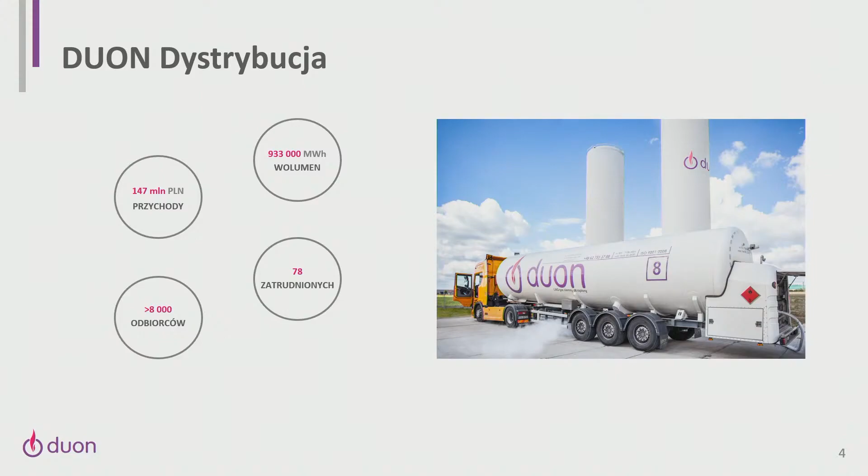The numbers you can see on the screen show clearly that we are solid, big partners: more than 900,000 megawatt hours, more than 8,000 consumers. We are owners of 21 regasification stations across whole Poland, and we have 720 kilometers of gas network and connectors.

We also have a transport company specializing in LNG transport, so we have all logistical support in a single hand. We have 18 road tankers and 16 road tractors, and we are switching to use LNG as fuel in our trucks. In a moment, we will be a living example of using LNG in transport in Poland.

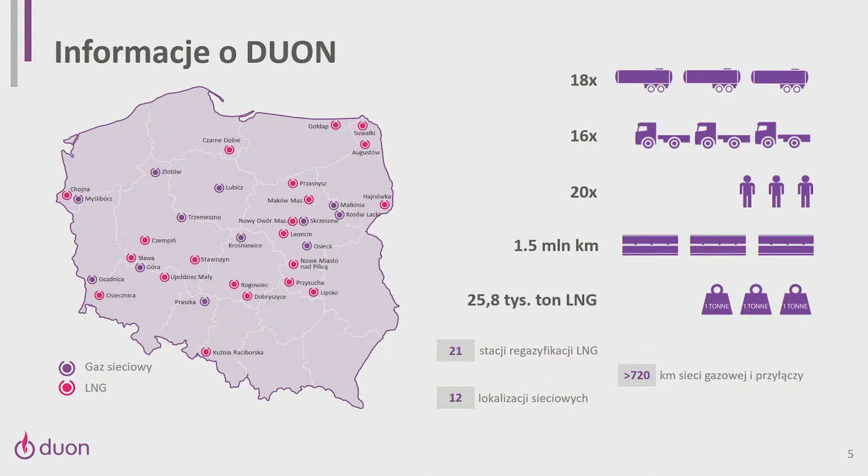Within our investment activity, we also provide electricity from cogeneration installations. Currently we see that this is a trend that's becoming more and more popular, and this market has been growing. Currently we either provide power, or in a moment we will start to provide power, at 29 megawatts of installed power from cogeneration.

Recently, we have introduced to the market a smart gas concept. This is a concept of smart power for our customers. We are able to cover all energy-related needs of our customers using this smart gas installation. From a single installation, we can provide heat, electric power, and also use it for cogeneration purposes.

This smart gas concept is actually a group of products, smart gas and smart drive. This concept consists of adjusting the size of the LNG regasification stations to the real needs of the customers. Usually, due to investment costs, the regasification stations were built for the largest customers, who were the largest consumers of gas.

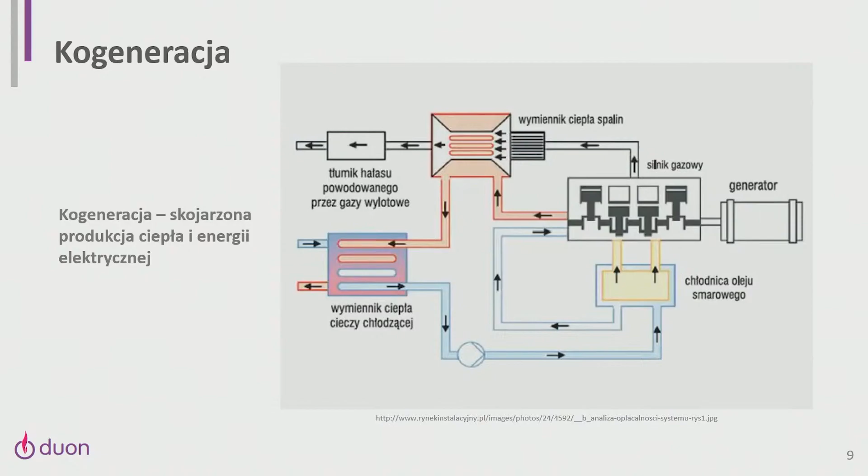So now we have a very simple example of how LNG could become a very simple bridge to solutions that will be able to operate as 100% green solutions when they run on the right fuel. This is especially important in the context of the current legal regulations designed to support development of cogeneration.

Since the previous year, we have a state system of supporting cogeneration. This is based on the bonus principle, I mean special subsidies for development of cogeneration installations. I'm not going to elaborate on this, so to cut the long story short, depending on the condition of the installation, whether it's brand new or already existing, we have a guaranteed bonus, cogeneration bonus, or individual cogeneration bonus.

So in the context of our product, smart gas, and in the context of using biogas, the guaranteed bonus is most important because it's dedicated for the smallest installations. The cogeneration bonus and the individual cogeneration bonus are designed for larger installations. So for LNG gas used as a fuel for cogeneration purposes, we may cover small installations of a power up to 1 megawatt to get this guaranteed bonus.

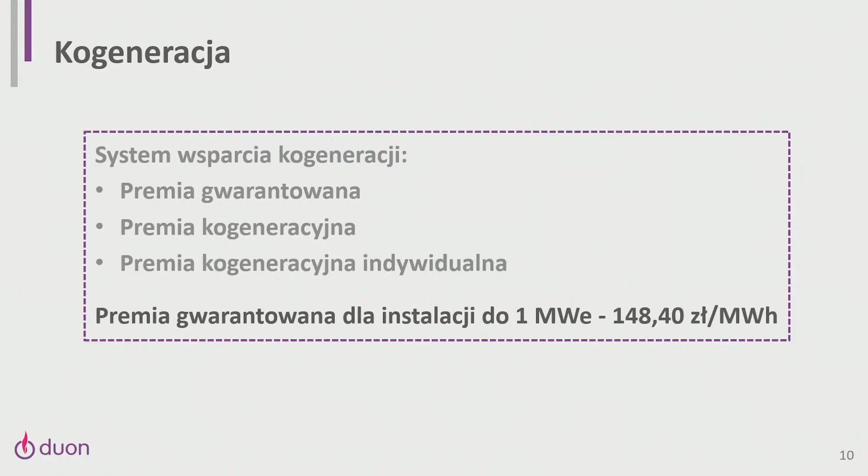However, keeping in mind that recently the energy minister made a decision that the cogeneration bonus is paid from the zero level, we need to wait until some critical mass is gathered for projects in this area. There is enough money in the system to support such projects, but there must be more projects. So this could very significantly increase demand for LNG as a fuel for this kind of installation.

And based on these governmental plans for the number of cogeneration units planned to be supported, calculated based on regulations in the law, I tried to estimate the size of the LNG market as a fuel for small cogeneration installations. We conducted these calculations for the Polish LNG platform as a member of this platform. As for the methodology, the base data on plant capacities were taken from the regulatory impact assessment, and I assume two ways of development of these installations.

In the first, pessimistic option, I assume that 10% of all installations will be running on LNG. In the optimistic variant, I assume 30% will be running on LNG. So 30% would be a very optimistic vision of the development of this market in terms of providing energy from LNG. And even in the pessimistic variant, in 2026 the volume of LNG will be 50,000 tons for these installations.

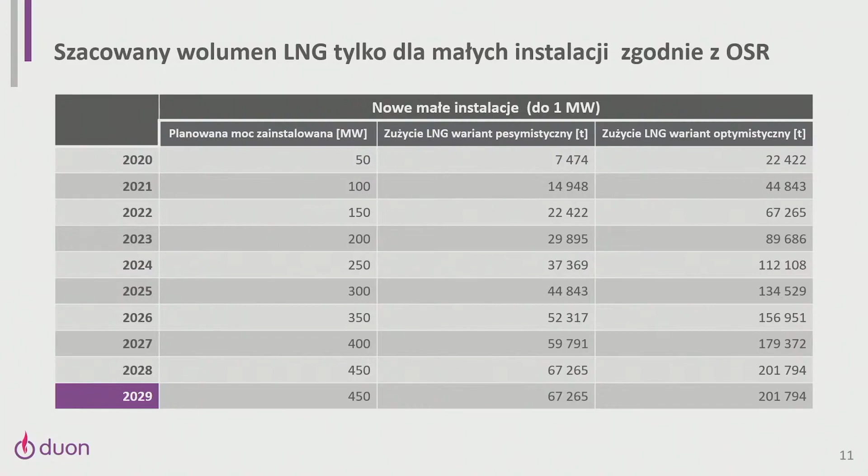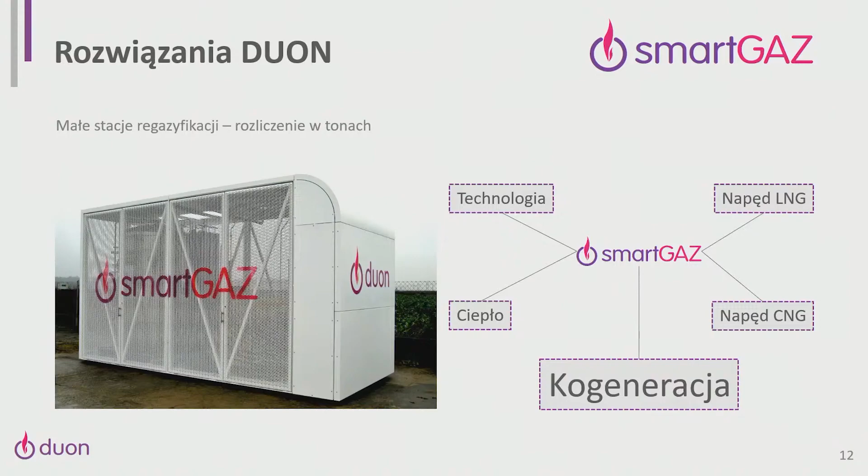And of course, with use of our dedicated solutions, this scenario will be closer to the optimistic rather than the pessimistic variant. We believe that cogeneration will play an important role in development of the LNG market in Poland, and the LNG market could in turn play a very important role in development of cogeneration. You saw this slide before, so coming back to smart gas, you can see that cogeneration is marked with much larger fonts. It seems cogeneration could be one of the most important applications of our smart gas concept, contributing to development of the whole industry.

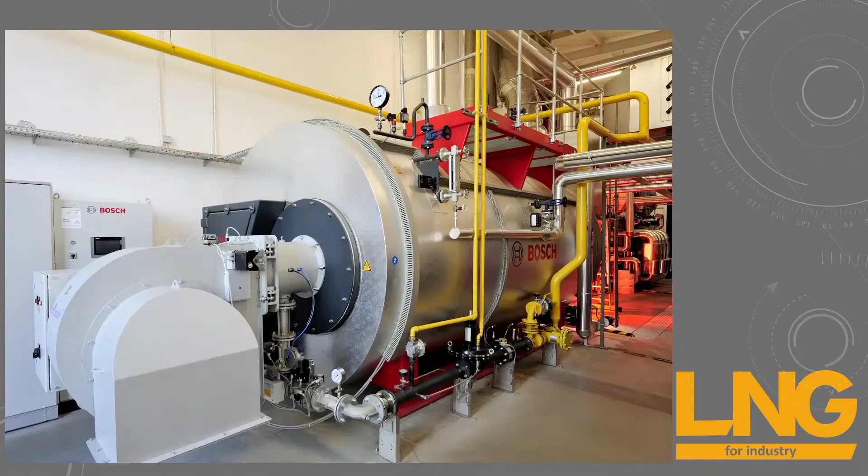The subject of my presentation will be cold energy obtained from the process of LNG regasification. I hope that our presentation will extend your knowledge about this. The Best Systemy Grzewcze company consists of several divisions. Engineering deals with design, delivery, assembly, servicing and delivery of fuels to all installation industries. This is the oldest part of our company.

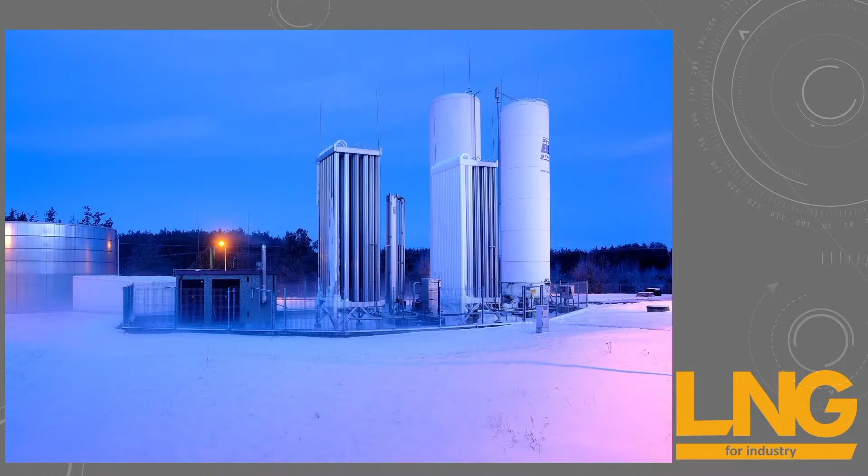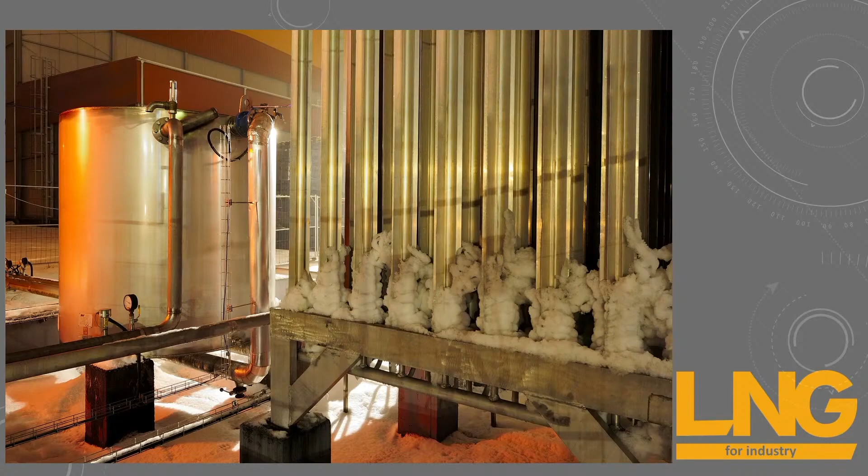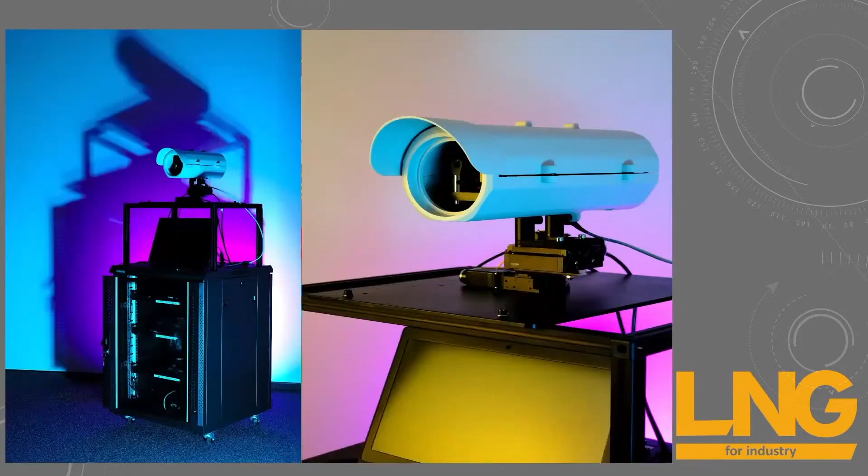Cryogenics, the regasification station. Although you could see some ice on this slide, these installations are environment friendly. We've been cooperating with the Polish natural gas company. Science. Within this division we develop the technologies of detecting methane with laser, and we also develop new technologies of welding. Due to safety reasons, we have invested in very advanced solutions, and production of our products is very advanced and

safe. Space. In this area we are testing an air platform that will allow us to detect steel pipelines buried underground, and we are going to detect any gas leakage from those pipelines from the air. Cryogenics, I mean the subject of my today's presentation. Let's come back to the regasification station.

Here we see our first cryogenic heat exchanger that we used to learn about behavior of the media, and based on this heat exchanger we developed another heat exchanger, and it's covered by a patent application. So this is the exchanger that was used in our research to be tested by means of a thermal camera to trace behavior of its parts.

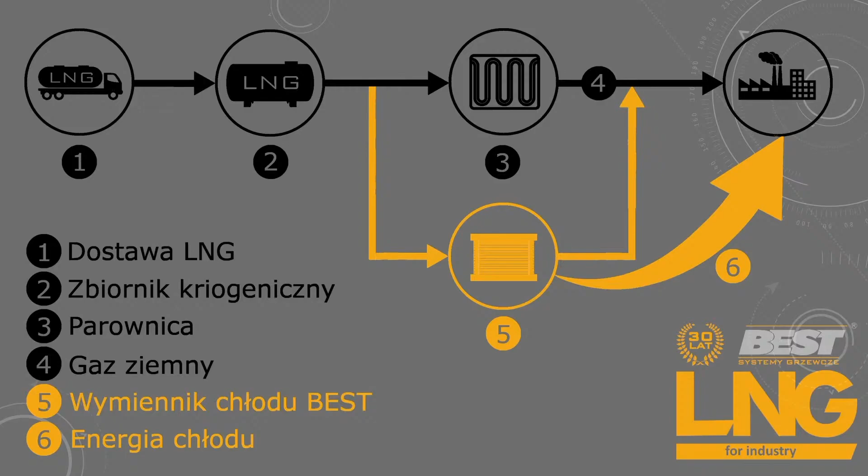First, the LNG is delivered to a cryogenic tank. Then it's sent to a coil of a heat exchanger to be regasified, and then it's delivered to the customer. Our installation is equipped with a heat exchanger that provides the cold energy. It's filled with glycol, and this cooled down glycol could be used to support operation of a cooling installation in an industrial plant. Today we also work on recovery of cold using other media than glycol.

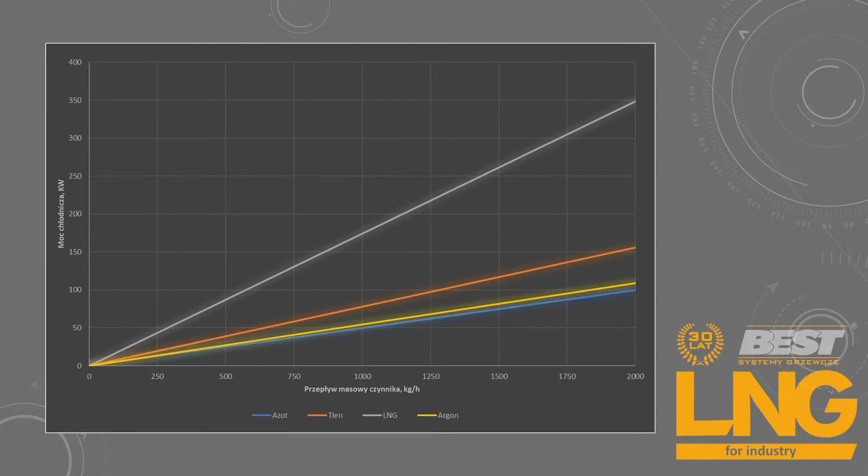Here we can see our heat exchanger. During the test you could see some ice, but this was done on purpose. This exchanger passed all the tests successfully, and it was made available to all possible customers. Our graph here shows how much energy could be obtained from liquefied gases. And there is no doubt that LNG is the best source of coldness. And we are going to focus on this. However, we also work on liquefied hydrogen.

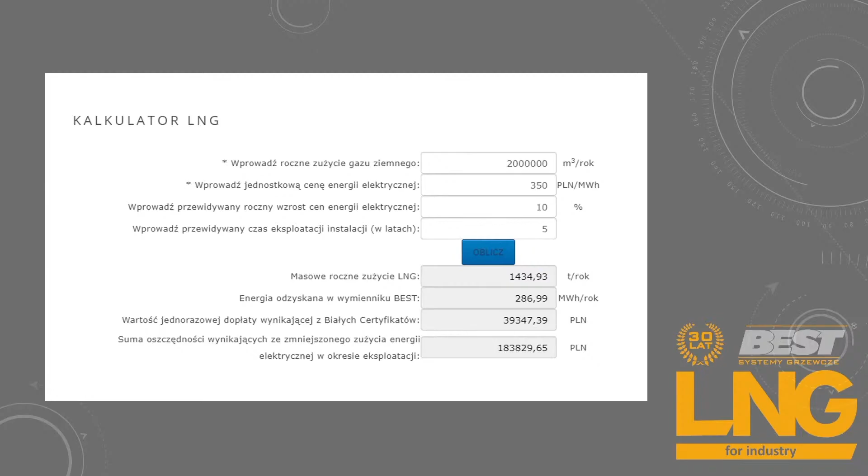And of course we may also obtain a subsidy for the white certificate, after presenting our results for approval by the right authorities, and in 5 years we may save this way about 180,000 zlotys.

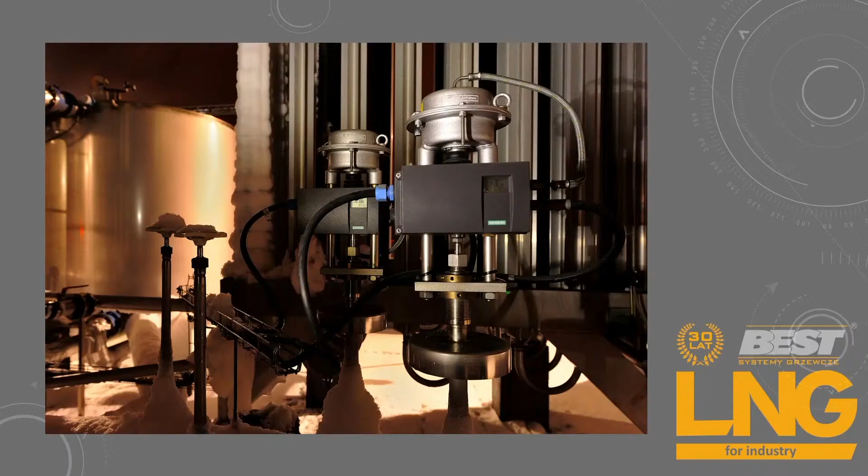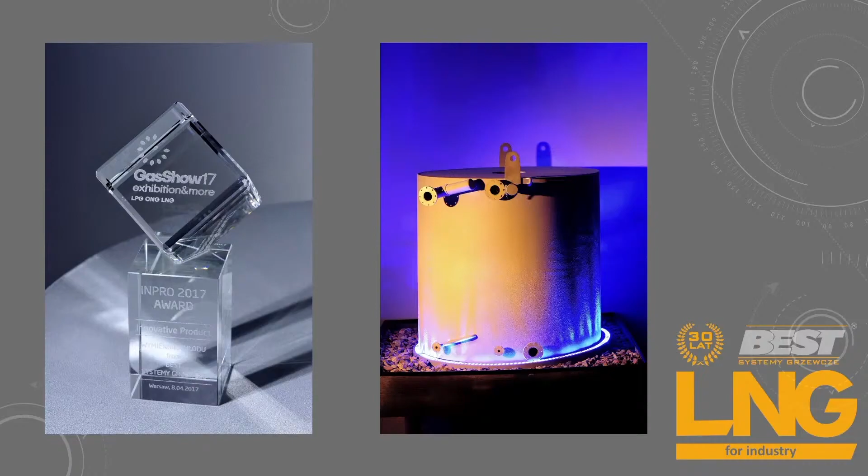In our regasification stations we install only brand equipment, and safety is our priority. If due to any reasons there is a break in recovery of cold or problems with circulation of glycol, automatic pneumatic valves are switched, and we just keep the process going so the customer doesn't see any problems, and the system informs the operators about any irregularities.

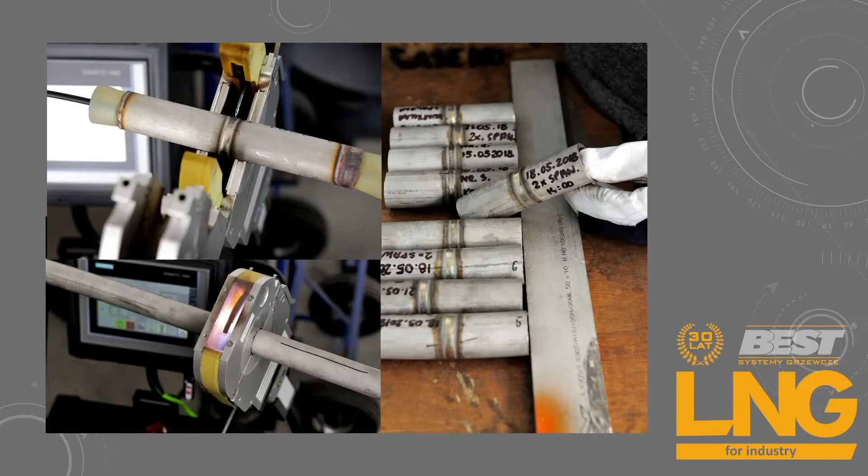We were pleasantly surprised to be awarded a special prize for our heat exchanger at the Warsaw Fairs. Now let's talk about our science division. Talking about research, the Best Systemy Grzewcze company has implemented the quality management system, and it's continuously testing and developing welding technologies. Here you can see orbital welding of elements of a coil of a heat exchanger, and we take samples of the welds to make a cross section and to check it.

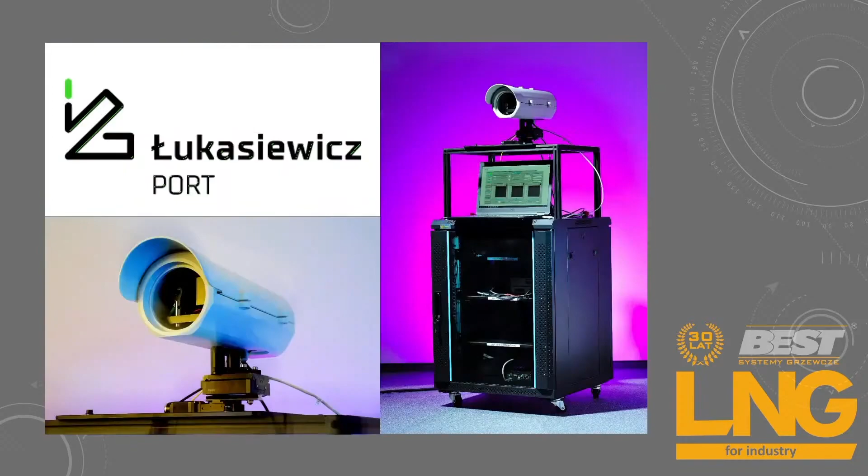One of our devices that we are still developing is a methane detection system based on a laser. Currently, in cooperation with a scientific institute, this system is being configured for operation in the field at the regasification station. It continuously monitors the space over the whole regasification station, and if a methane leak is detected, it alarms the operators.

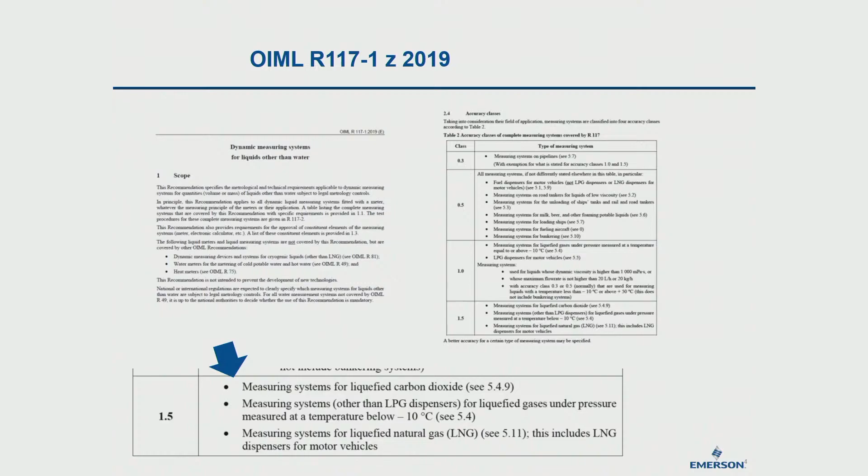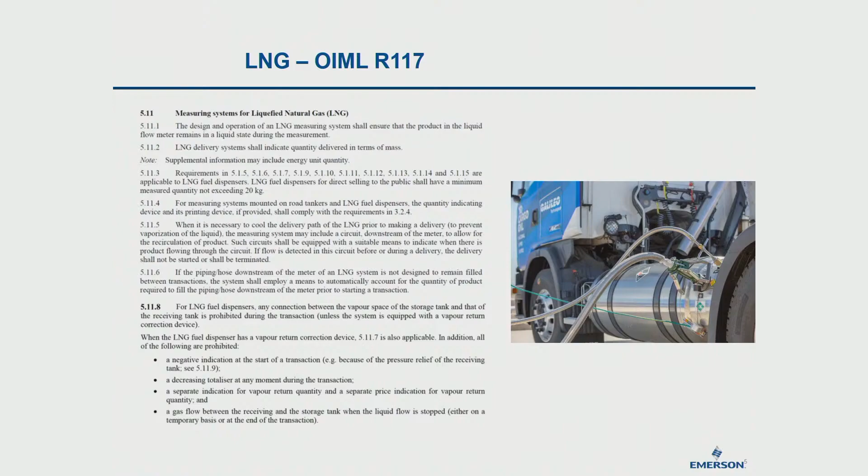OIML also recommends that in all equipment for handling trucks where there is a return of the gas phase, the gas phase also has to be measured. So in case of trucks like Iveco, if we tank a truck, we collect vapors, and it has to be measured. So we have two flow meters: gas mass to the truck, to the tanker, but vapor comes back to the installation in kilograms. They should be measured. We are sure that the driver who receives the gas is not cheated. He got 500 kilograms of gas, 20 kilos return, so the driver pays for 480. So OIML recommends using two measurements, on gas phase and liquid phase.

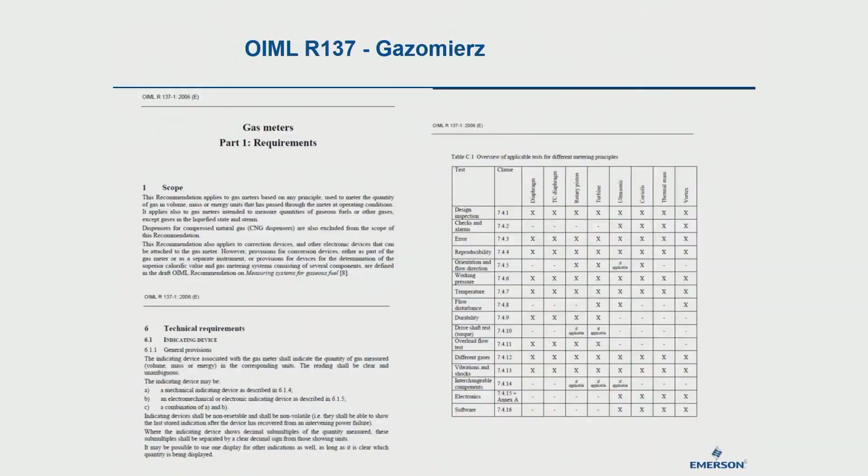Another example are gas meters. So on gasification stations, when we have a measurement of volatile gas, there is a different OIML item for gas meters. So billing can be either in meters or kilograms. We have approved installations, which I approved, where we have mass billing gas meters. R139, gas distributors: there is a separate recommendation for high pressure gases and for tanking vehicles. This recommendation includes CNG distributors and also hydrogen. In this recommendation, you have the requirements for the distributor and the shape of such an installation.

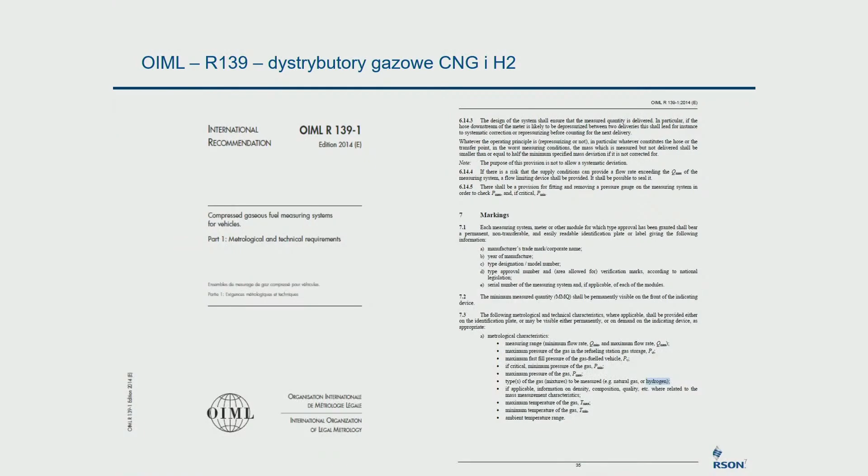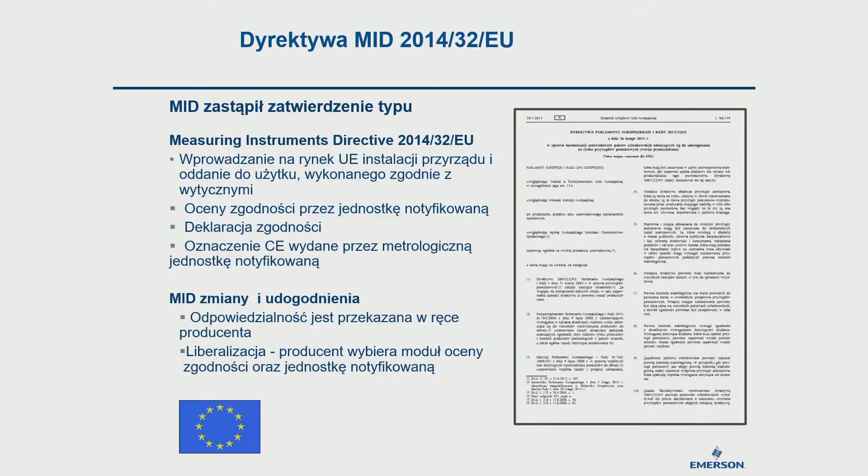Here we have the directive, MID. These were global recommendations, and the directive shows us the situation in the EU. The directive was introduced to unify law and requirements and make it easier for producers to introduce measuring equipment on European markets. The directive relates to 10 types of equipment. We have water meters, gas meters, heat measurement, liquids other than water, scales, and taximeters. Even beer glasses have to be measured according to specific regulations, and equipment for measuring emissions, it's all under MID. What we are paying for is under MID.

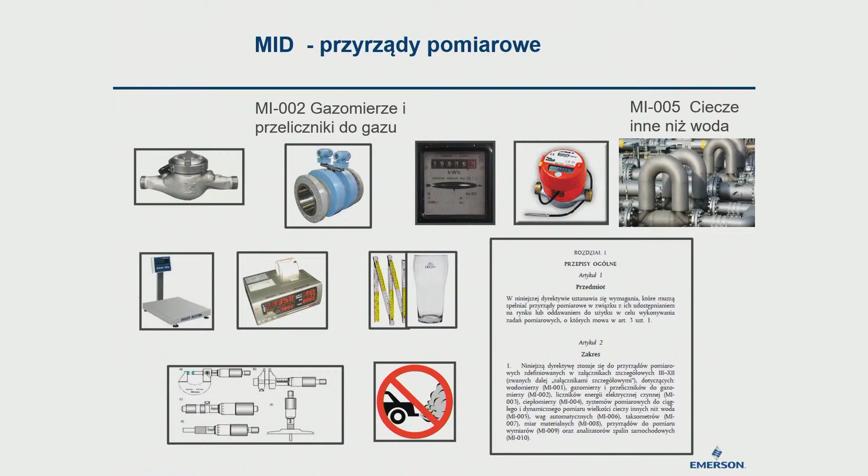The producer has a system certificate, then either we introduce a notified entity which approves the installation, the F module, or the producer has officers who are authorized by notified entities, and such a producer representative may approve such an installation.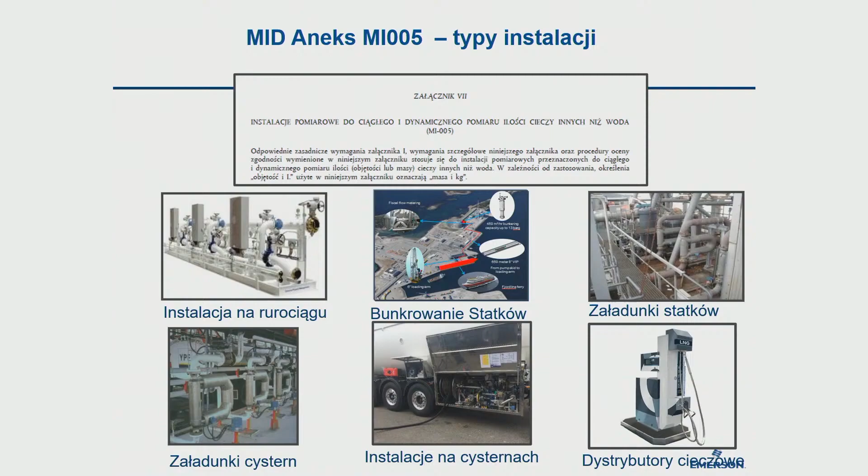So we are building a system. You have to ensure certain requirements are met so that the officer approves the measuring system. This is a number of combined items of equipment. We have various types of systems. We have systems on pipelines, 0.3 system.

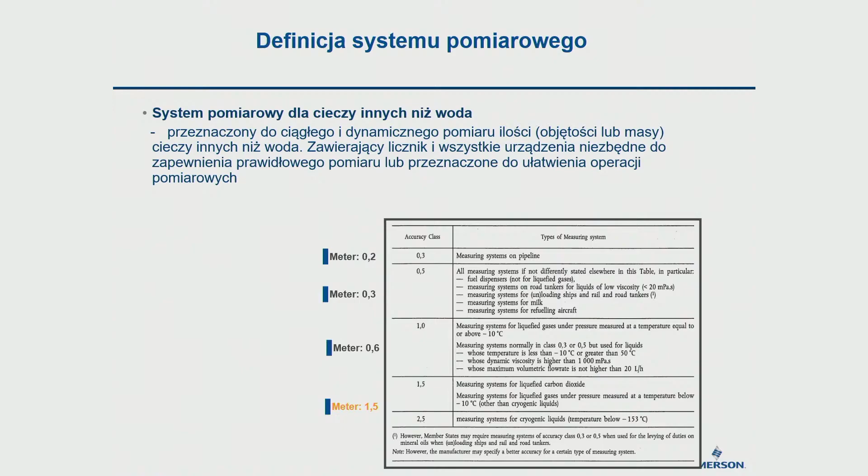There is inconsistency between OIML and MID. MID was issued in 2016. OIML with recommendations is dated back to 2019. Maybe there will be an exchange, and formally large LNG installations will be measured with accuracy up to 1.5%.

Minimum requirements for such MID installations is type of installation, be it a pipeline or loading, and you select the right flow, 2 liters with tank or maybe 20 kilograms, types we match to the technology. So if we are at low temperature, we have admission for low temperature, or for high temperature we have to prevent bubbles of gas in the measuring equipment because it falsifies the measurement.

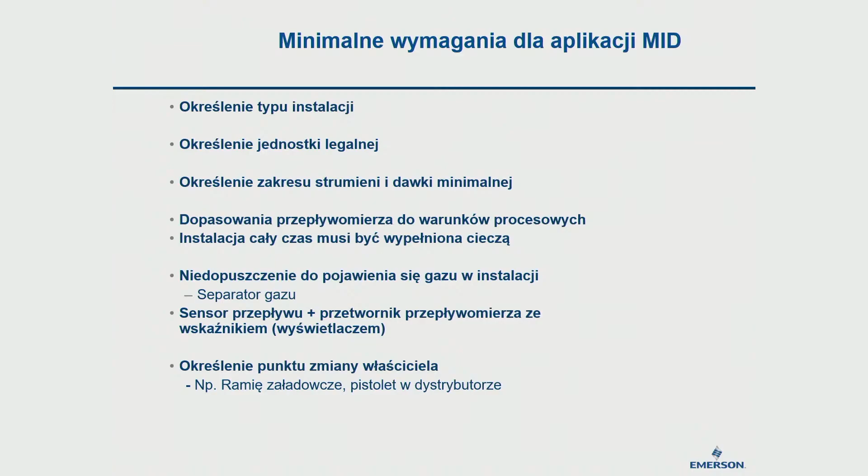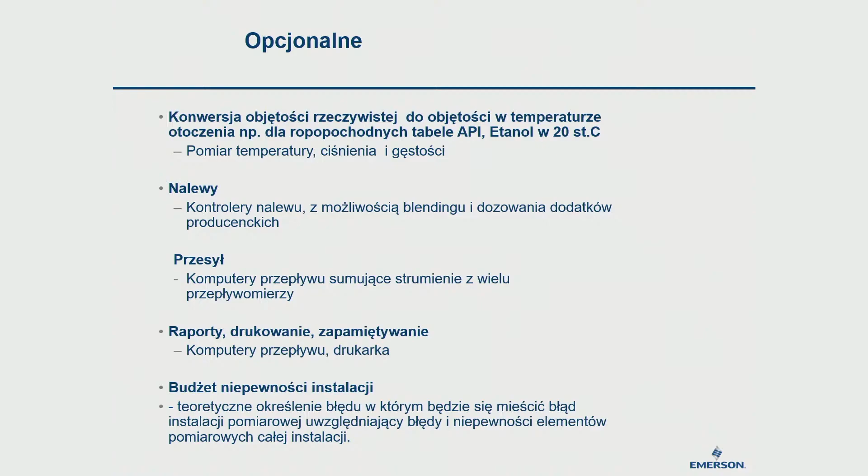We have to determine the ownership change point, and also optionally we have to have pouring controls that control the whole pouring process. If we have ethanol, we can calculate for reference temperatures. Printers also have to be using equipment, and selecting the whole system with what accuracy we expect it will be dispensing the product.

This is an example of a certificate, an MID certificate for a system. This is a system on a cistern where we can see the type of the system, components used in the system, the diagram of the installation, and in the picture you can see the installation on the car system.

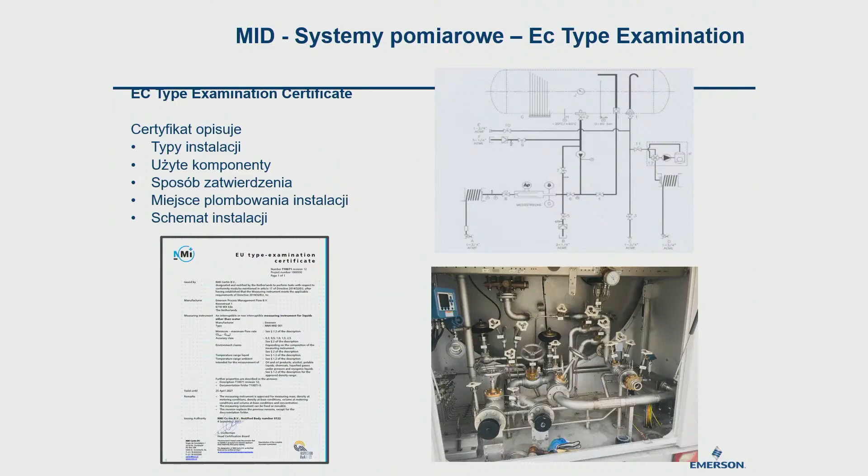When it comes to gas meters, it's Annex 2 this time. Annex 2 speaks of 2 types of equipment, gas meters and gas converters. Gas meters can measure either in mass or in volume units. The approval is for the B+D module, and the approval is by the officer, the certificate and approval by the measurement authority. And we speak of a gas meter, but it's only for fuel gases, for energy carrying gases.

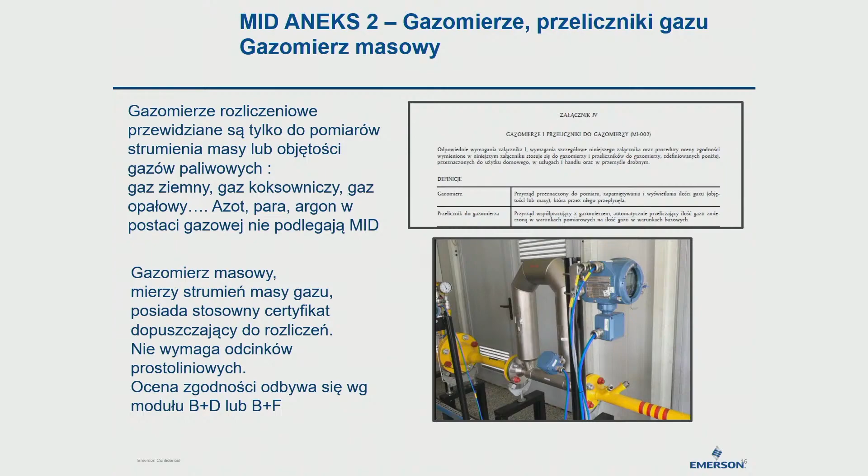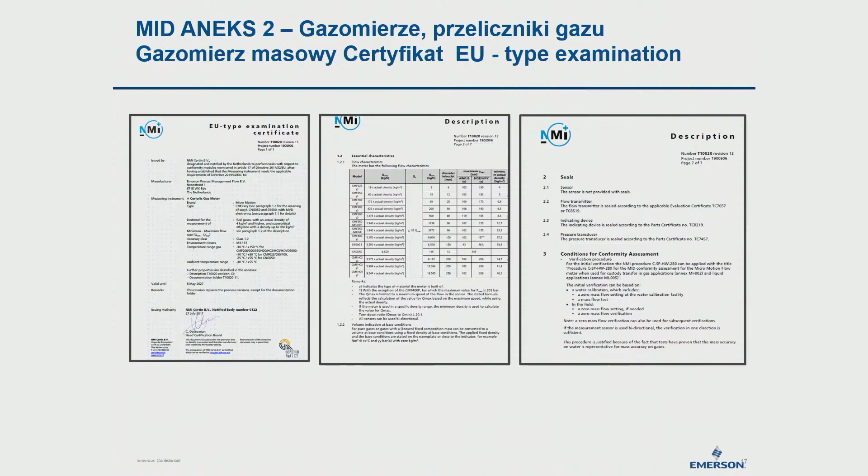We cannot do it for argon, for nitrogen or hydrogen, as long as hydrogen is used for technical purposes. If it's used as a fuel gas, such a hydrogen installation can be accepted by MID. Here we have an example of such a certificate where you have a list of devices and admission ranges, pressures, flow ranges, etc. But what next after the introduction of MID?

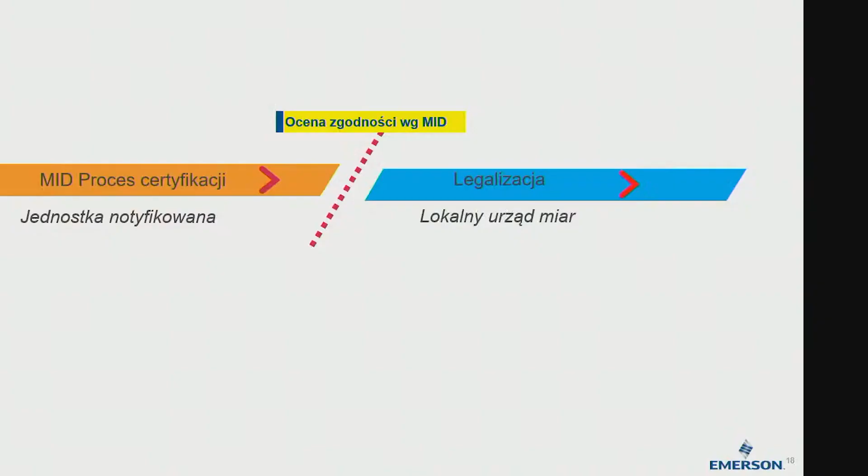Because MID speaks of introduction of an installation to the market. We already have our local law where we have the measuring authority, a local officer who has to conduct on an annual basis a legal control metrological audit. And here we have the journals of laws, and in the journal of law it says that MID did not specify upper limits relating to the streams.

Unfortunately, our Polish law determines that if the installation is to be a billing one, and we want to again approve it, when it comes to gas meters, it can only be up to 0.5 megapascals, and the stream cannot be bigger than 100 cubic meters per hour. So if there are big flows or pressures, officers will not go about approval of such equipment.

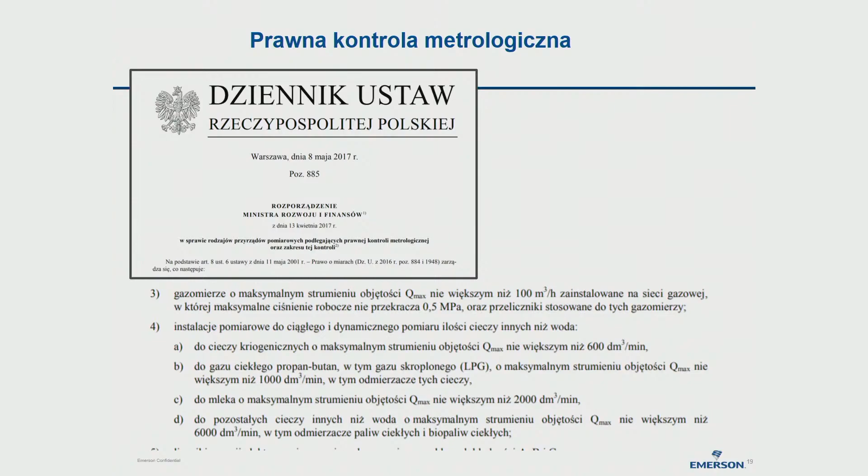And when it comes to liquids other than water, we have cryogenic liquid, 600 liters per minute. But given that OIML says that LNG is not a cryogenic technical liquid like nitrogen or argon, we can speak of an upper range up to 6,000 liters per minute. So when building an installation for ship bunkering, we can build an installation with capacity of 6,000 liters per minute. You can later legalize it with some template.

The legalization points are master meter equipment, the recommendation of the Minister of the Economy that says that for cryogenic liquids there is a control reference, a comparative measure that has up to 600 liters per minute, and confidence has to be 3 times better than the audited measurement installation.

So if we have an installation for 1.5%, the reference equipment that checks a given installation has to be 3 times better. So the measurement unit has to be class 0.5, and on the installation even 3 times better. Let's check the next slide.

And here such references are the so-called POGC labs. POGC has 2 such equipment items, one for measuring cryogenic tanks, another big dragon to check the installation of technical gases, nitrogen, argon or oxygen. Those installations have metrological permits of the main authority, and with these installations POGC provides calibration

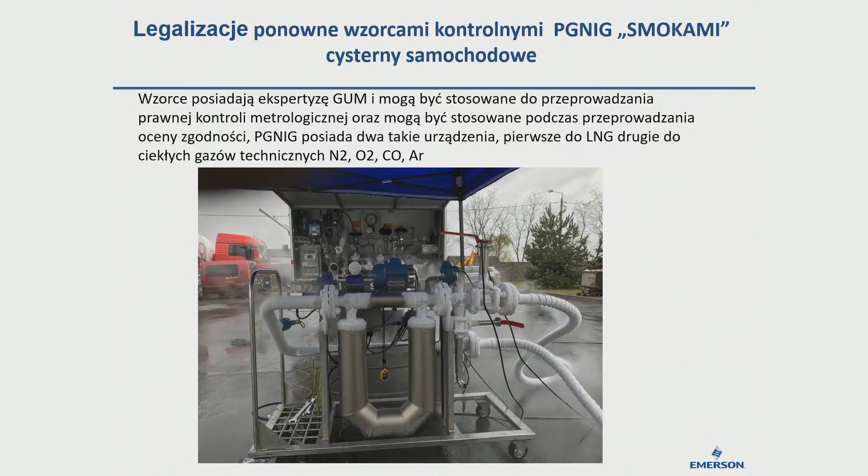services during checking the installation before it's admitted to the market. Here such a dragon in action, it's calibration of a tank. We are pushing gas through this dragon from one installation to another. There are recommendations that everything is okay, and if we have the right values, fine; if there is adjustment needed, adjustment on the cistern is done, and again you have to check.

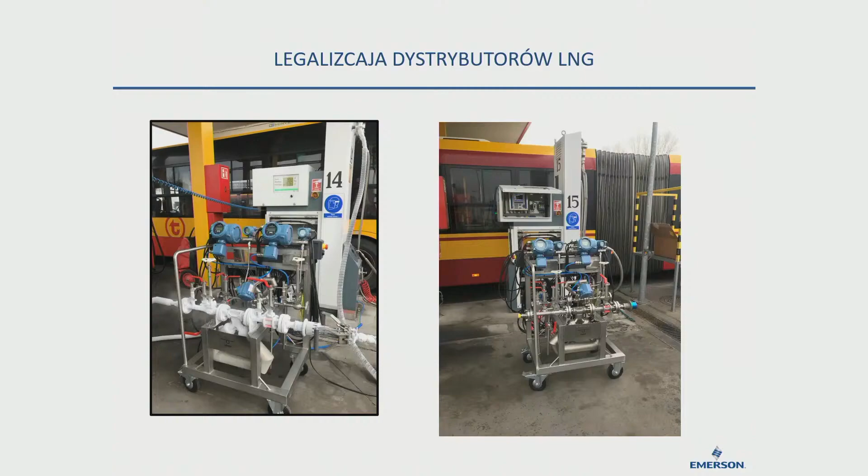This is an interesting piece of equipment, a smaller dragon owned also by POGC laboratory. It's an equipment which is unique across the globe because it has 2 measuring units, one for liquid phase and one for gas phase. So if we have a distributor equipped, and there's such in Poland, and we have a Polish producer who produces such distributors equipped with two measuring items for gas phase, we can check and calibrate such measuring equipment in accordance with regulation. So this is an example in a bus terminal in Poland.

I'd like to show the certificates for these two dragons, and this is one smaller one for calibration of the fuel distributors. I'd like also to mention verification of CNG filling pumps, because in Polish law there is no mention about this. However, there are some CNG pumps in Poland, and their number is growing. So the question is whether 1 kilogram of this compressed natural gas is really distributed as 1 kilogram.

And the Ministry of Economy, I don't remember their current name, hasn't developed regulation about the relevant calibration of such a fuel pump for CNG. And in Western countries or in the USA, there are some standards built based on the Coriolis dynamometer to calibrate such an installation.

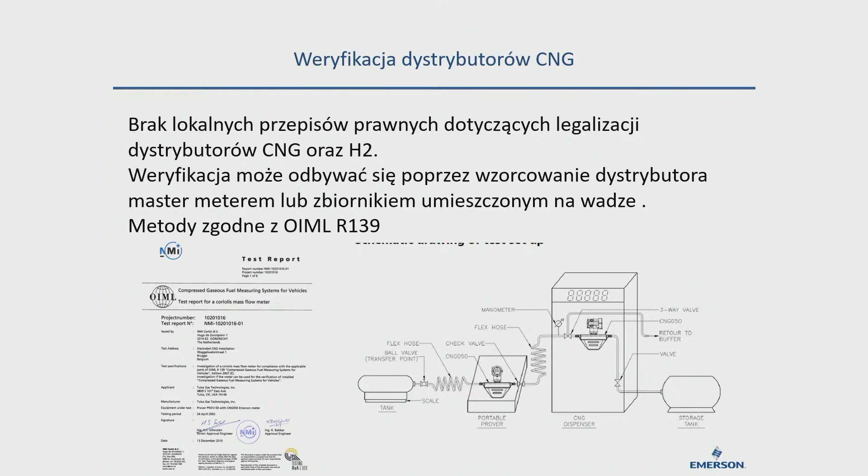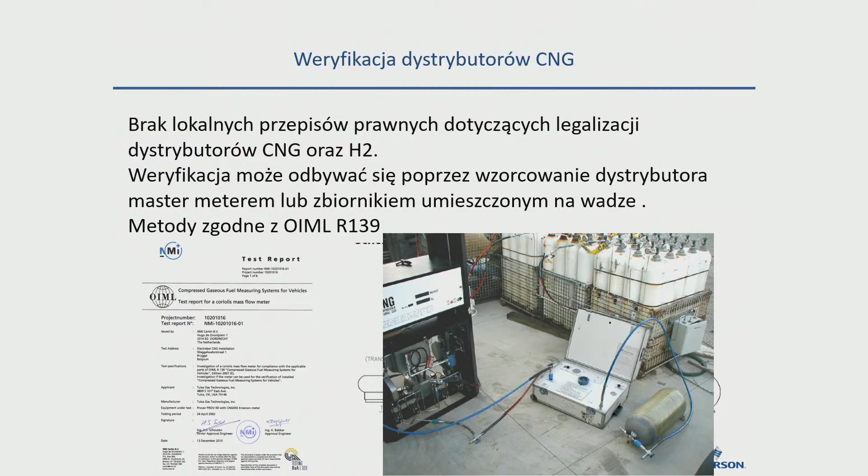And an owner of such a pump may invite an official from the main measuring office to ask about calibration of his distributing pumps, to know what's the measurement error. But this will not be a calibration certificate. Here you can see an example of a check of such a pump for CNG. There is a flow meter in this suitcase.

So to sum it up, we may use the Coriolis dynamometer to calibrate pumps for both liquids and gases. We have flow meters running, for example, on liquid hydrogen. It means that it has some minus 250 degrees centigrade. Everything is in agreement with OIML R117, now talking about the flow capacity, 600 liters per minute.

We can say that these are not cryogenic installations running on liquid other than water, because for cryogenic liquids, the temperature of the liquid must be below minus 153 degrees, and for LNG it's sometimes minus 140. So we are talking also about measuring the returning gas phase.

And we expect introduction of legal regulations for calibration of CNG and hydrogen fuel pumps. I'm not a specialist on taxation. However, if we buy something, there must be clearly stated what regulations are used for clearance and how to check this distribution pump.